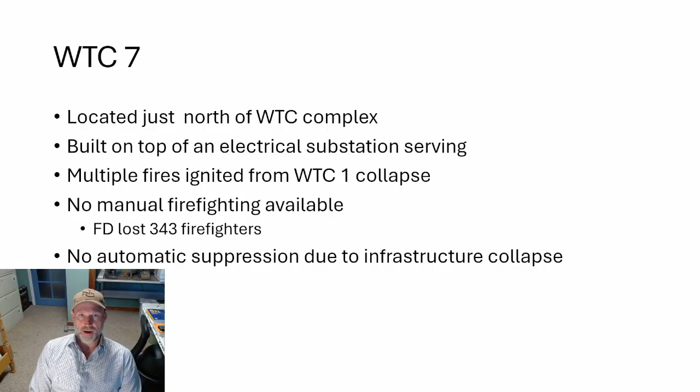But regardless whether it continued to burn or not, the fact that you did have a fire here, and fire at other locations, clearly shows there was some fire transfer during the collapse of World Trade Center 1. The other thing that makes forensics challenging on this particular building was the light obscuration from the collapsed towers. WTC7 was to the north of the World Trade Center Complex 1 and 2 that collapsed, and that dust kept shrouding the north side throughout the day. Consequently, it was challenging to see where fires started and their progression because of that. There were telltale signs that fires were there, but it was challenging because of the light obscuration to identify exactly how that fire occurred and where it transferred.

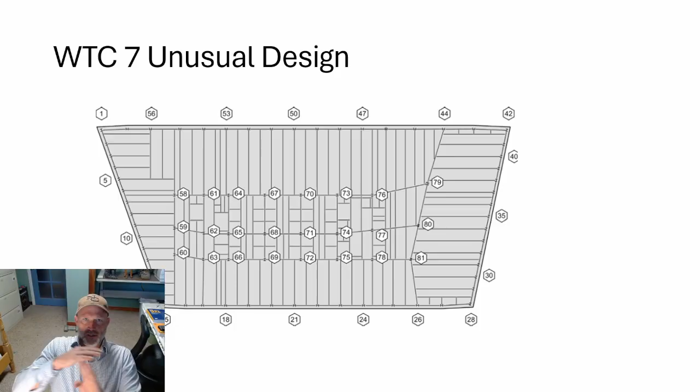Now, normally in a building, take a look at two beams here. You may have a couple beams at this location, but you're going to be restrained, so when you have thermal expansion pushing from one direction, you're going to be pushed from the other direction to keep the thermal expansion in check. That's a normal, basically 90-degree orthogonal type design typical for structural steel construction. This is different, very unique, and it has to do with two factors: one was the substation, but the other was the truck drive-through for deliveries, things like that, which made this location unique. If you look at the footprint, this is the standard footprint for upper stories.

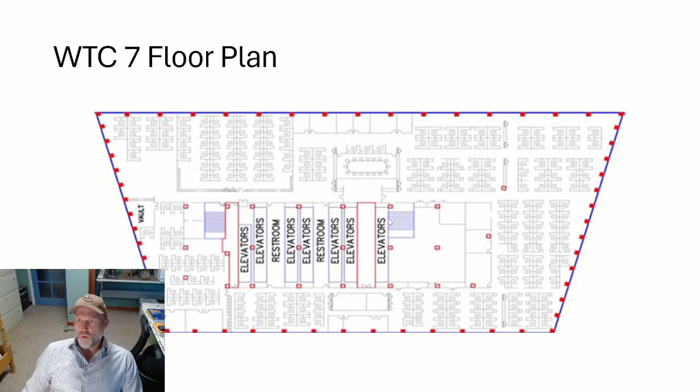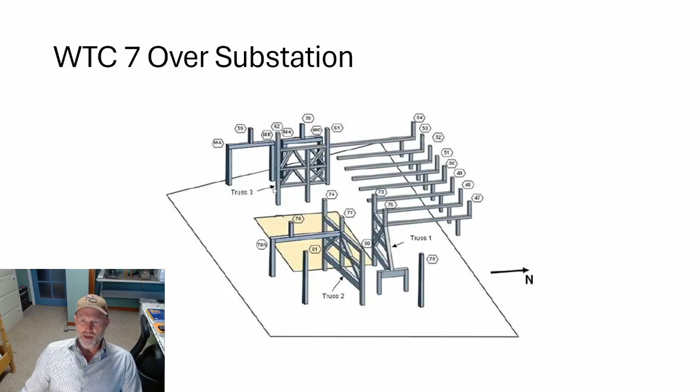And if you look at it more closely, column 79, these spans are 50 feet. So these are 50-foot I-beams here.

In some other videos that I did on my website, my YouTube channel for fire forensics, a couple of those videos discussed thermal expansion as a subset topic within metal deformation.

Typically you're going to have on the order of about 1 times 10 to the minus fifth per degree Celsius. So if you have a 100,000 unit length, and you raise something 1 degree Celsius, you're going to have a 1 out of 100,000 unit length change. So it's a 10 to the minus fifth type relationship.

So if you had 10 degrees, you'd have 10 units. If you had 100 degrees, you'd have 100 units. If you had 1,000 degrees, you'd have 1,000 units, or a 1% type change. So here, a 1,000-degree Celsius increase, which is typical in flashover conditions, gives you a 1% change in your length. So if you're dealing with a 50-foot structure, that's 6 inches - you're actually expanding 6 inches at 1,000 degrees Celsius.

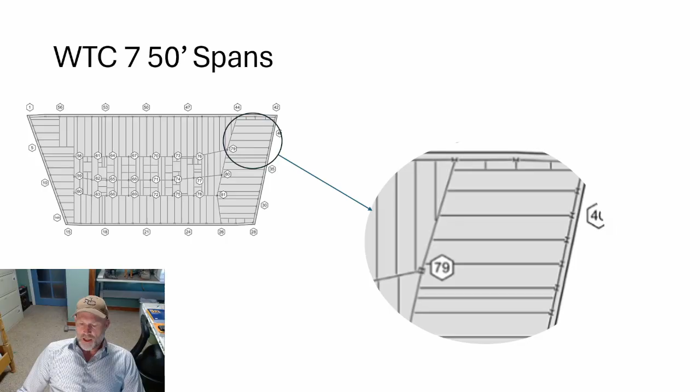So that expansion, and then later the contraction, results in moving your beams off of their supporting girders - that expansion pushes girders off of columns or support mechanisms. So it's an important topic to consider when we look further into this.

So what you had here is a penthouse over column 79. It was very obvious from the destruction, the catastrophic collapse of that structure, that if you looked at where the penthouse was, it was over column 79 when the whole thing collapsed. That's where it started. Then after the forces were redistributed during that collapse, you saw basically like dominoes - the whole structure collapsed like an implosion.

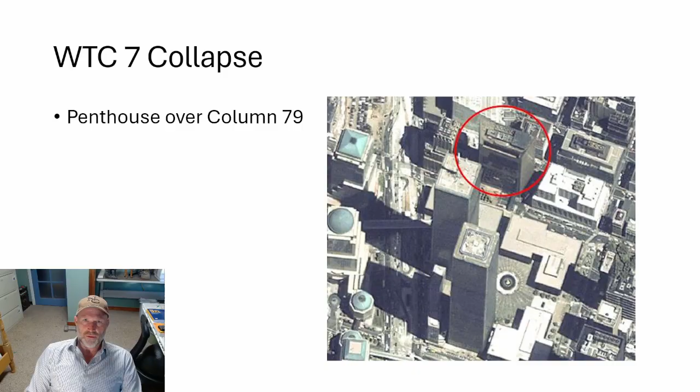There's nothing necessarily nefarious here in terms of some of the conspiracy theories, and that's why this discussion is being put on YouTube, so you can understand the forensics as reported from NIST in terms of the actual computer modeling. We'll go through some of the conspiracy topics, a few of them, just to explain things.

So if you look at the actual fire modeling, your column 79 is going to be in that vicinity. And what happens over time is you may not have flashover in those wide areas, but what you do have is what's called a traveling fire.

So you have a fire start, and then it moves and expands and broadens, and then you have significant heat applied in the column 79 area over time. And that's the key element: time.

Because these structures - this particular structure had an excellent fire rating, I believe it was 2 hours at this location - but because it burned for 7 hours, you had heat transfer going into those beams in a fairly hot environment.

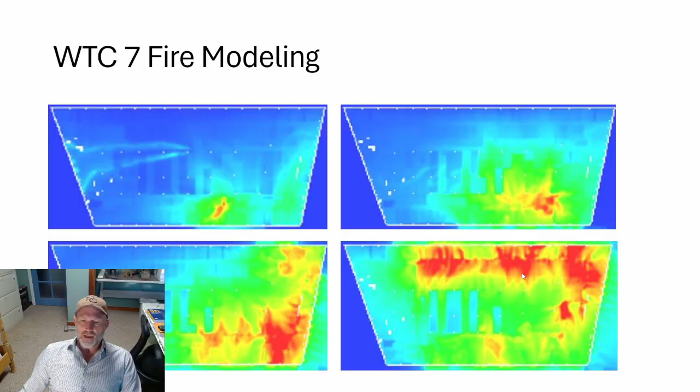And what that did is it weakened the material to a point where it really couldn't resist the applied loads. So if you take a look at the actual structural analysis as a function of temperature, and you look at this column 79 location over time, you can see that it gets hotter and hotter by the time 5 p.m. rolls around.

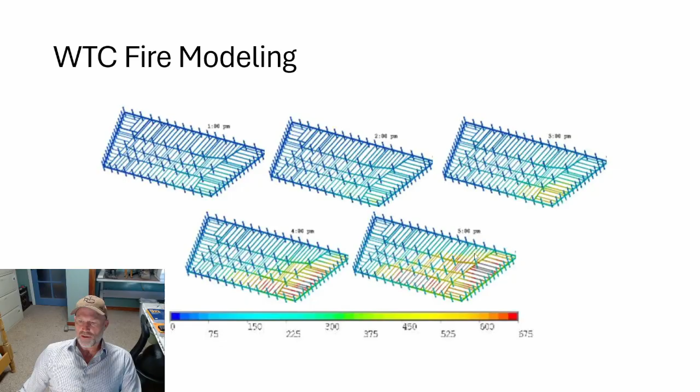So you have 1 p.m., 2 p.m., 3 p.m., 4 p.m., 5 p.m. By the time you're at 5 p.m., I mean, you're hot - 500 degrees Celsius. It's a very hot environment by column 79.

So if you look at that and understand that about 550 degrees Celsius is typically used in structural design for having no load. And I'll show you some charts that indicate it's about 538 degrees Celsius when you have about 50% of your structural steel strength - that's really the target for structural analysis.

And let me just back up a little bit. Typically, when you're doing a structural load analysis, it depends on who you talk to, but for the most part, the margins are pretty tight.

If you look at chapter 16 in the International Building Code that targets structural design, there's about a 25% safety factor built in, which is typically assumed. Other sources, particularly the earlier 1968 New York City Building Code, suggest more of a 10% design margin. So you're always going to overbuild structures.

And then there's another factor called redundancy. When you design a building, you're designing for a fire to happen in a particular location and set of circumstances. You have multiple passive and active features to fight that fire, and you're always going to rely on manual firefighting. So you're not designing a building for widespread fire travel.

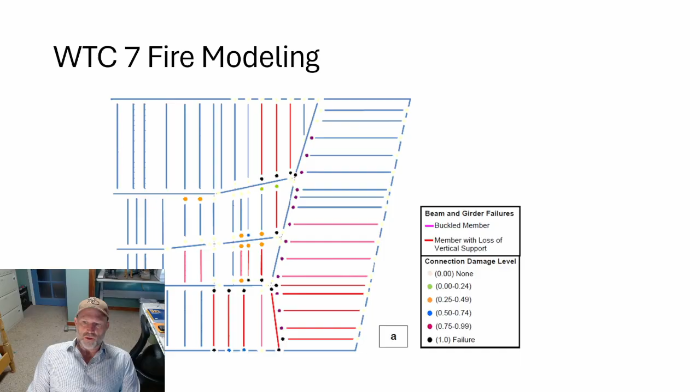But what was interesting in WTC7 is it wasn't a concentrated fire, and it wasn't just the loss of column 79. It was multiple columns that lost their strength because of prolonged exposure to high elevations of temperature, and that resulted in multiple columns failing, as this image shows.

So at column 79, it may have initially buckled or failed, probably through buckling. There are some other features I'll hopefully get the chance to address. But once that happened, other portions of the structure were also weakened by thermal heat transfer and thermal expansion, resulting in loss of yield strength.

So you may have had what appeared to be an implosion under the penthouse, under column 79, but because of the other weakened members, you had a series of dominoes. The redundancy was lost, so the force transfer to redundant members, other columns through the girders and beams, didn't have the resistive strength left within them. Once column 79 failed, you saw a series of dominoes that took down the entire facility because the temperature had been raised in too many locations and weakened.

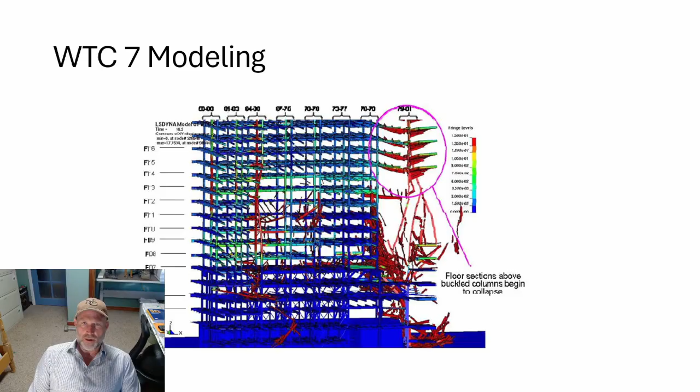And I'll show you some other stuff here. Thermal expansion was occurring at temperatures hundreds of degrees below typical design temperatures. That's an important feature, and it has to do with redundancy and with a traveling fire.

If you're designing for a localized failure, you're going to do so for a flashover situation. Typically flashover involves about 1,000 degrees Celsius, but you're going to have spikes up to about 1,300 degrees Celsius, then it hovers around 1,000 degrees Celsius for flashover conditions. Let's define flashover conditions.

Flashover is when you have a sudden rise in temperature and heat flux within something due to compounded thermal transfer from reflection off the walls and ceiling. If you have a fire, normally radiative heat transfer can take that energy out of an area, but in a compartment or room, the walls reflect some of that energy back, and you hit a critical point where the energy exponentially goes really high.

Then suddenly you don't have enough oxygen to sustain combustion. It becomes what's called a ventilation limited fire. Those hot gases are ready to combust, hot enough to combust, with ample fuel, but they don't have oxygen, and they're going to travel until they find it. So typically when you see broken windows and flame emerging from a window or door, that's a ventilation limited fire—you're in full flashover at that point.

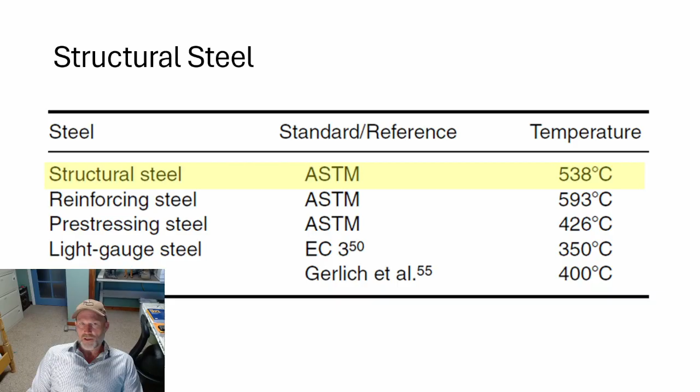So this is basically the threshold for design. It's 538 degrees Celsius for steel. If you look at why that is, it's based upon - this is from the SFPE Handbook of Fire Protection Engineering.

But what happens over time with steel is there's two factors: there's the yield strength, the actual strength of the steel, and then there's the elasticity of steel. It's like a spring - if you have a spring, a certain amount of force, you exceed that force, it's going to be deformed. So the modulus of elasticity gives you the amount of stress you can apply to that spring and still have it come back to its original form.

Now, you may think non-intuitively, but a beam can also be modeled as a spring using what's called Hooke's law. If you apply a load, push it or pull it, it's going to spring back. And what happens at elevated temperature, not only does it lose that springiness, the force that it pushes back, but it loses its overall yield strength.

Typically, annealed steel is about 35,000 psi, pounds per square inch, for its resistive yield strength. And with different alloying concentrations and work hardening and things like that, you can get the steel up substantially more than that. But typical structural steel, for the most part, I think is about 35,000 psi.

So this is an interesting test, what's called ASTM E119. The E119 standard fire is a furnace that has a specific size to it, and I think it was developed around 1918 thereabouts. But what it does is it has a very specific temperature profile that you test materials in for.

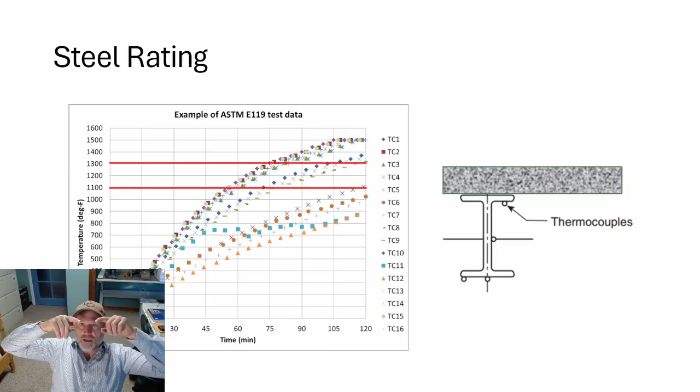What happens then is the lower flange is going to have hotter temperatures than the upper flange. And because of the thermal expansion, the lower flange expands more than the upper flange, and that's what gives you a smiley face profile for beams. That's one factor - the other factor is applied load bending a weakened steel member. But a lot of people don't recognize that the thermal expansion on the bottom, more expansion is happening there than the top, and that creates a smiley face profile.

So here, the bottom member is profiled by these series of thermocouple results - it's hotter than up high. Now, if you look at 60 minutes, this is an analysis for 60-minute applied fire rated material. So if you have 60 minutes here, 1100 degrees Fahrenheit is the target for failure, about 538, 550 degrees Celsius thereabouts.

I think this is a little bit more, 600 degrees Celsius, but regardless, it's in that ballpark, and that's the target for this analysis. So at 60 minutes, you're exceeding that threshold for available resistance to an applied moment load. You blast past that over time, and then you get above the point where there's just no strength left.

Keep in mind, the data logger was limited to 1500 degrees Fahrenheit here when this test was conducted. This would continue rising in elevated temperature.

But what's important to note is that when you're designing these facilities, if in this analysis it was 1 hour applied fire resistant material, you were meeting specifications for that bottom flange to avoid failure within an hour using the standard fire. WTC7 was not the standard fire.

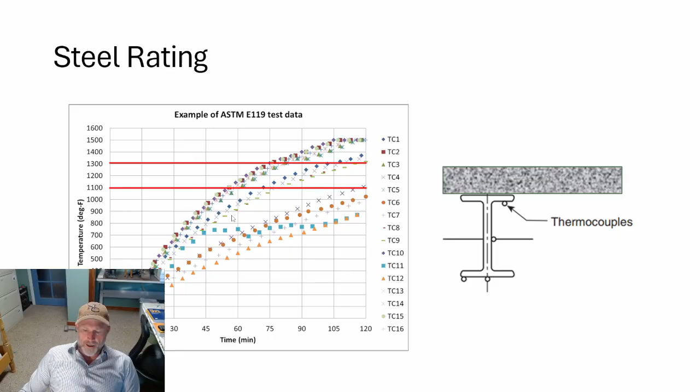So let's talk really quick about restrained versus unrestrained. This is interesting because the definition from ASTM E119 for restrained is that when it's surrounded by a support structure that's capable of resisting substantial thermal expansion. The reason that's important is the amount of fire resistant material, the thickness, is going to be different for a restrained member versus an unrestrained member, and that has to do with the thermal expansion. You need more in an unrestrained member to make sure that during thermal expansion, you're not going to lose that fire rated material.

World Trade Center 7 had the fire resistant material applied to it based on conditions for restrained members. This is typical, and it's problematic because there's issues with that. The American Institute of Steel Construction has specified that just about any structural application is going to be restrained, and that's not the case. It wasn't the case in WTC 7. And this is what drives it home.

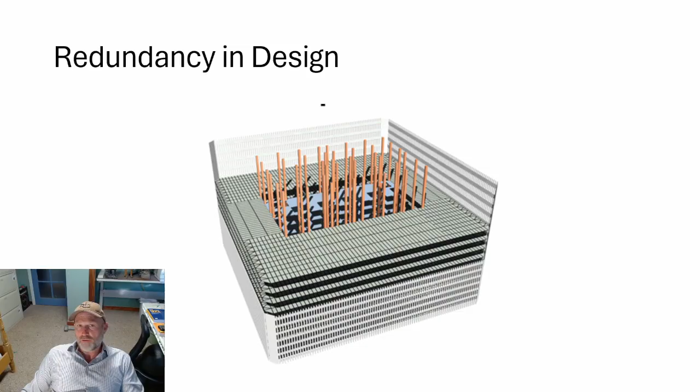And to be honest with you, a lot of people attribute the fuel as the factor for failure. Not quite the case. What you can calculate from the fuel in the fireball that resulted after the plane impact, most of the fuel actually was burned up pretty quickly, in the first few minutes of the fire.

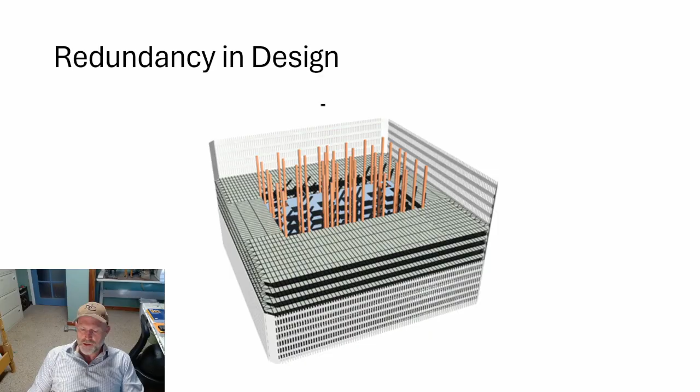The prolonged exposure actually came from the combustibles within the facility on that structure. So this demonstrates this principle of redundancy. Let me go back really quick to this chart. So what we're getting at here is, keep in mind with fire protective material, what we're doing is prolonging the time before you hit this point here.

And keep in mind also that at 538 degrees Celsius, you've reduced your strength by 50%. And also keep in mind, typically when you design a facility, you're only about a 25% safety factor. So you're heavily relying on that principle of redundancy. So you're going to exceed localized temperatures in a typical flashover condition, exceeding 538 degrees, particularly if you have damage to your fire-rated material.

But in the case of WTC, you had widespread damage because of the length of time the fire was permitted to travel through that facility. So you had weakened material, and basically it was a combination of expansion and weakened material due to fire rating loss that resulted in this collapse.

But there's one other factor I wanted to mention here, and that has to do with this smiley face effect. As soon as in the vicinity of column 79, once the fire transferred its energy into the beams, you had the smiley face form.

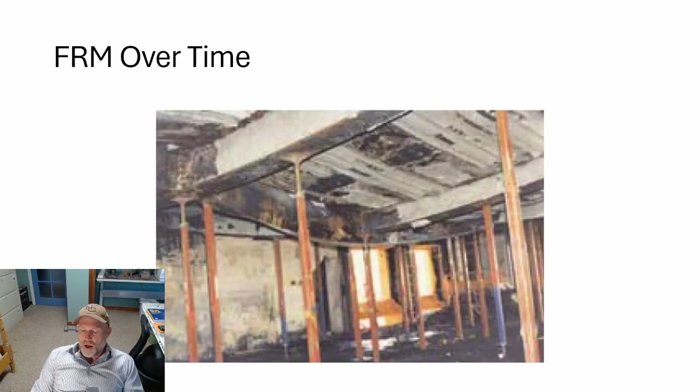And that's most likely what caused the girder itself to be removed from the support of column 79, where this collapse happened. So let's take a look at a couple things really quick.

So back on this, ask yourself, in all sincerity, this was treated as a restrained member for fire rating application. Do you really think this is a restrained member? No, it's not. These are not restrained members because there's nothing countering the force associated with this thermal expansion.

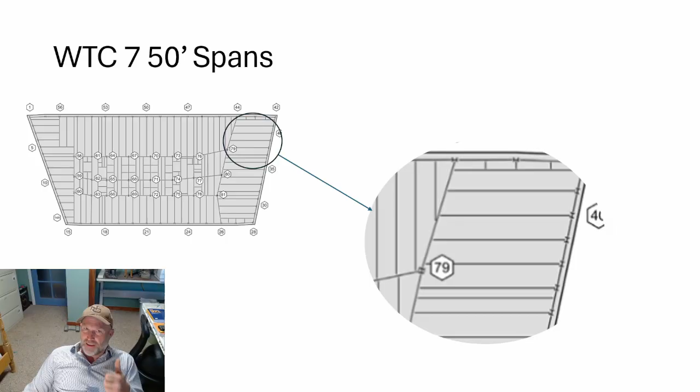So what you would have seen happen is, if this thermal expansion occurred, the column supporting the exoskeleton of the structure would be pushed out, and likewise this heated-up girder would similarly have pushed in. So you have less fire rating material than necessary. Even though it was approved by code, it was less than necessary because it was treated as a restrained member.

In fact, this whole vicinity, because of this unique configuration for the truck drive-through and the electrical substation, is a unique situation where you don't have restrained members here. So there's no restraining members along these locations. That's why column 79 most likely failed, because it just was not adequately restrained.

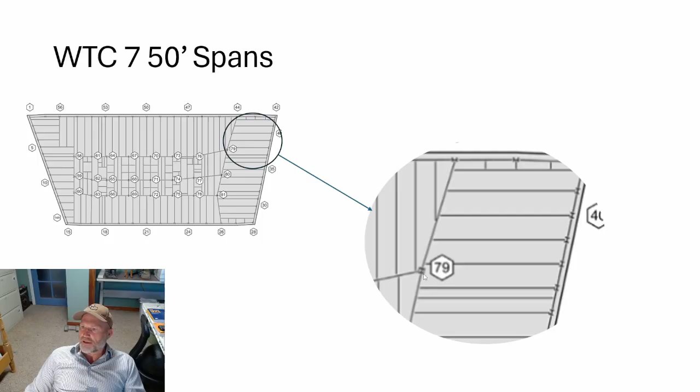So this girder attached to this column likely would have pushed over from its support, and you'd have had some buckling due to eccentricity in the load. So just something to consider.

There's nothing nefarious about the WTC collapse. This is something that under prolonged exposure you would have expected to happen. A lot of people think there are conspiracy issues, like a loud thump heard, an explosion or something. Well, there are a lot of things that could have occurred there. You could have had a localized member fall off a column, making a huge thud, a big sound.

There were arguments that flowing metal was seen coming out of this facility. Well, that was clearly an alloying effect between aluminum and copper. It's very common in fires, and a fire of this size would have had substantial aluminum and copper.

People have erroneously assumed, because of the 1960-degree melting point of copper, that it wouldn't melt in a fire that was like 1200 degrees Fahrenheit. That's not quite true, because you're going to have molten aluminum at 1100 degrees Fahrenheit, and there's a principle called a eutectic alloy.

What happens is you can have alloying elements, aluminum and copper, alloy at cold temperatures, at the temperature of aluminum's melting point. So if molten aluminum falls on copper, it will alloy even though it's below copper's melting point. And the result is a lower melting point than pure aluminum or pure copper.

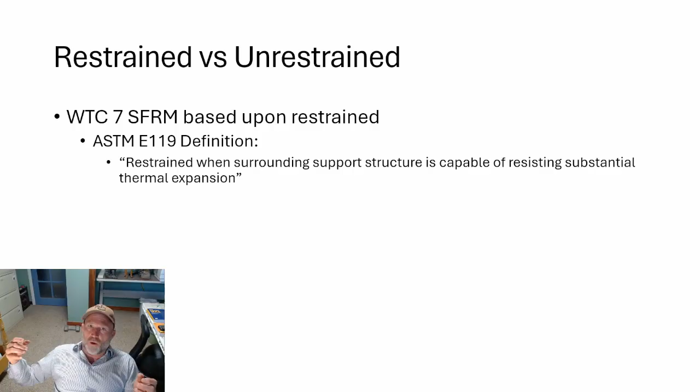So what would happen is, with molten aluminum, you're going to have a significant amount of molten aluminum in a facility. So you're going to see that flowing, the alloy between aluminum and copper flowing. And if there's zinc, lead, you're going to have a lot flowing through this old facility.

So there's nothing nefarious about that. This was very reasonable. Some people have claimed there was thermite residue, like it was painted on. Well, there's other telltale signs that could have produced that chemical footprint. So the assumption that there was something nefarious with the destruction of this facility when it burned for 7 hours, when the material was only rated for 2 hours, when you had this funky, unrestrained design because of the electrical substation and the truck drive-through.

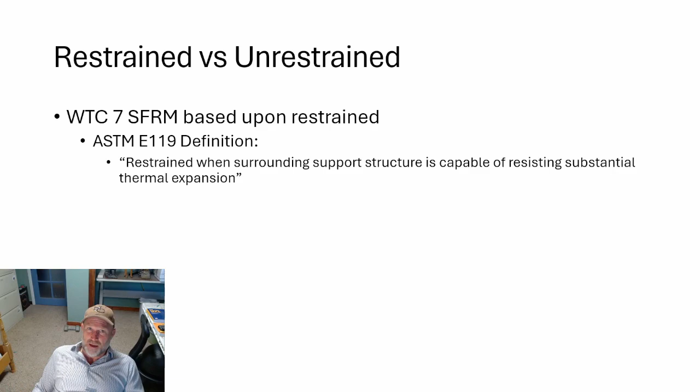All the models point to a normal collapse in those situations in the absence of both automatic suppression and manual suppression, manual firefighters. So it's very predictable. This isn't something weird. So let's just take a look at our conclusion.

Thermal expansion and cooling, that was the mechanism for failure. The structural spray-applied fire resistant material was for restrained, not unrestrained beams, resulting in faster failure for those beams. The structure was designed for life safety. It was not designed to avoid collapse.

And it worked very well for life safety, but it does raise another question. If you're designing a facility exclusively for life safety, how does that affect other people in a major metropolitan area like New York City? If you're going to have structural collapse, it's going to impact operations for other facilities. It's going to have a huge impact. So life safety itself as the principle for design may not be sufficient.